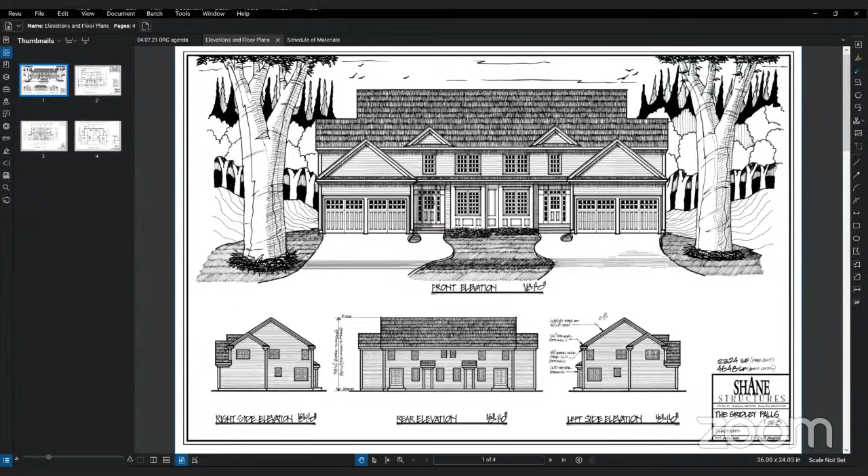Is my screen visible? Yes. Okay, you can see the drawings. Great. Do you also have the site plan, Diana? I can bring it up. Yeah.

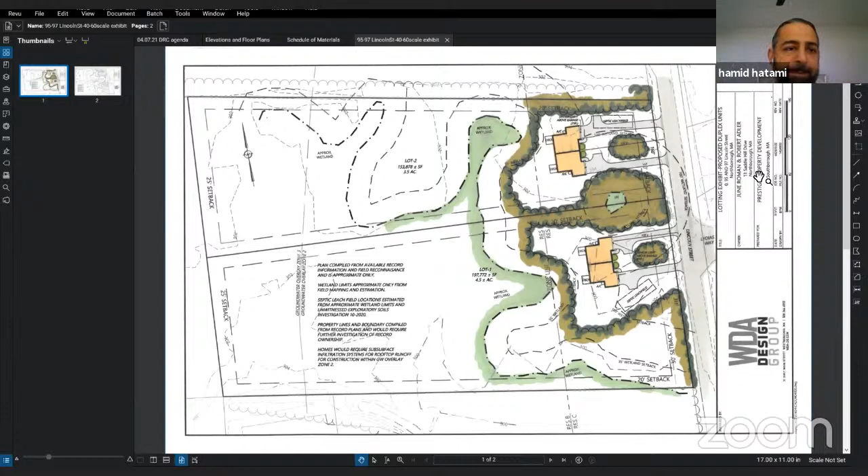So do we have Brian Waterman and Hamid available? Yes, and then there was a phone number in the waiting room that's no longer there, but I don't know if that was part of the applicant's team. Good morning. Good morning. Salam alaikum, Hamid. Alaikum salam. Thank you. So is Brian going to join us? I believe so. Yeah, it says he's connecting now. He may be having some connection issues.

So Hamid, Brian sent us some photographs of the site that showed the standing water in the northwestern corner of the site. Has he discussed this with you, how to mitigate that? Water and stuff, correct. Yes, yes. We'll be taking the appropriate measures for that, correct.

This is Brian Waterman. I'm having computer issues with my audio, so I'm on the phone. Can you hear me? Yes. Okay. Yeah, the photos, if you see the wetland line off to the left, the standing water and ice are in that internal wetland. Yes, inside the wetland there. And they flow to the south and connect with an intermittent stream that goes to a culvert, which discharges under Lincoln Street to the east. So that's where all the standing water is. So we've delineated the wetlands. We finished our survey location of those this week. We're working on finishing topography and property boundary survey.

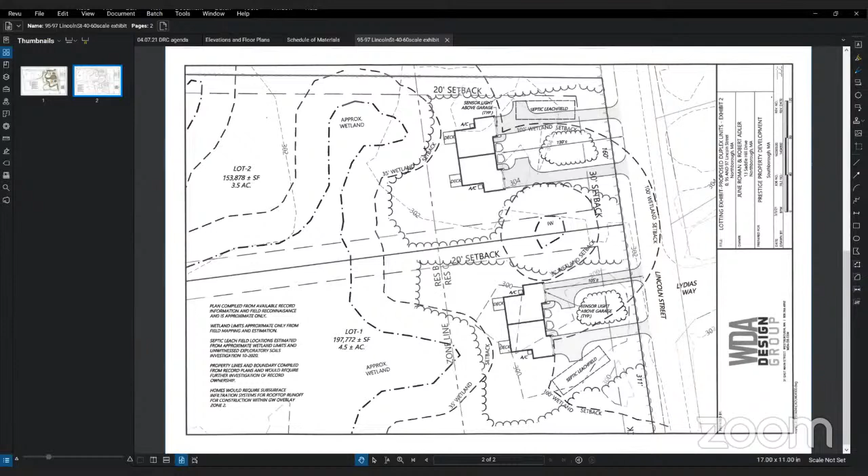Sure, yeah. I mean, this is preliminary stuff without a final design, obviously. So I think it seemed more to figure out what kind of style house would go there, and colors and things like that. But obviously, we need to do more engineering and testing to really nail down a design plan. Okay. Anybody else have any questions? Nope. So now we could go to the building design.

So we received some updated exterior elevations and floor plans and also a materials list. Hamid, did you want to take us through that? Sure. So the last time we presented, the floor plans weren't included. I believe it was David who asked to see them, and it's part of your design review guidelines to have them, so they are included here. They are reflective of what we're going to be building at these properties. I'm not sure if there are any specific questions you have on the layouts or elevations.

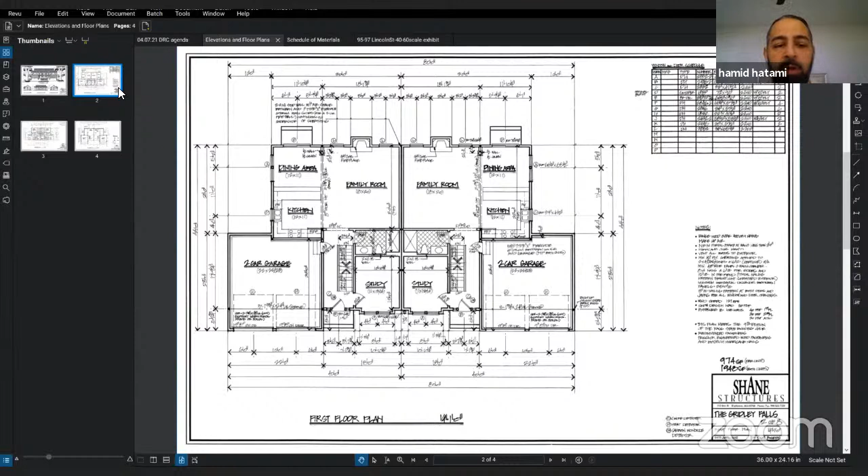I think exterior wise, they're the same, especially the facade. The only thing was on the rear of the house, the site plan was already reflective of where the patio was going to be, but the elevation had the patios on the party wall between the two buildings. They are separate. So the rear elevation hadn't been updated last time, and it is now.

So you showed that one building was going to be gray and the other brown. Do you have any color samples? Yes, so in the schedule of materials I provided links to the websites that have the exact colors and materials. I gave the specific colors, separated by 2 pages, duplex A and duplex B.

If you scroll down, you have to provide your zip code. We all know the zip code. So if you scroll down a little bit, you'll see the khaki brown in the middle, and the pearl gray down to the left. These two.

So is this a smoother textured siding you're proposing? It's HardiePlank, it's got some texture, slight texture. Can you get smooth? To be honest, I'm not sure, I'd have to find out. I think it's both available. Do you want me to look for it on the website? No, that's okay. My preference would be to have smooth, because if this is imitation of a wood product, you'd never have a wood product that would look like this. It would always be pretty smooth unless it was a shake or a shingle.

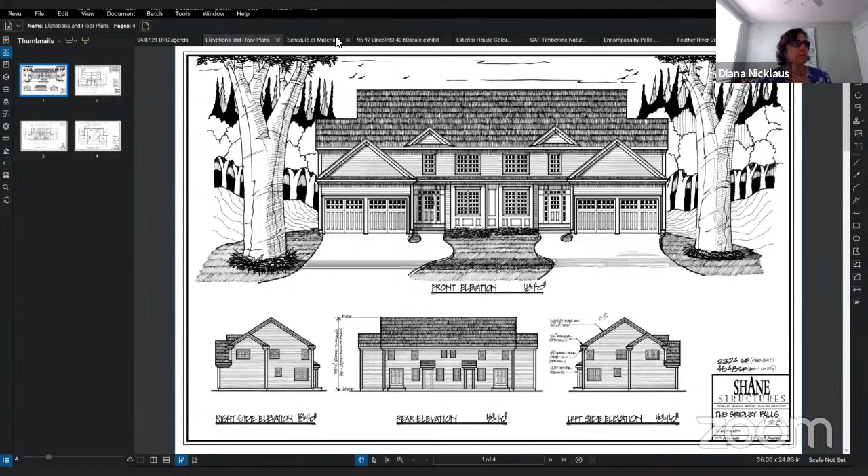And are the garage doors going to be like they're designed here? Are they going to look like that? They're a craftsman style door, so yes, they're going to have the details on the bottom as well as the glass inserts on the top. I use a Haas door.

Oh, that doesn't look like that one. Not like that one. Let me see if I can get it up on my web browser though.

So again, Hamid, if you're mixing colonial architecture with an Art Nouveau front door and craftsman style garage doors, you're getting a stew of styles. So look at your building and try to get the accent pieces to be consistent with the overall architecture.

Okay, I was on the previous Zoom meetings, a couple of them, and another gentleman had the same facade. I figured that this look is the same as theirs, believe it or not. I thought that it was a look the town was more looking for, especially when we started talking about the decorative handles that were on the doors I typically installed, and that wasn't viewed very highly. So I figured this was something you guys wanted to see, but if it's not, I'll gladly change it.

Well, it's not that we're looking for a specific style. We're just looking for the quality of your design work to be internally consistent, and not like a candy store picking one of these and two of those and throwing it together. We want the integrity of your design to work.

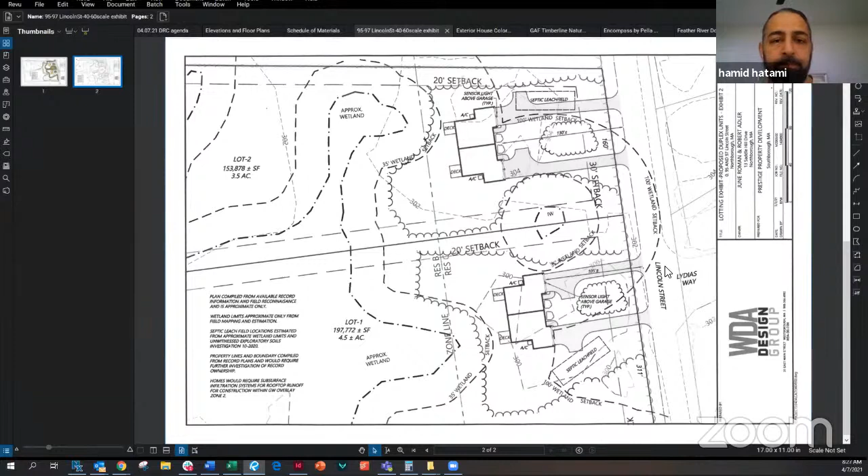I know there's not much on landscape, nor is there really anything for us to go by, but have you thought about doing any beds behind the two decks or on the side of the homes? To be honest, no. I wanted to keep as much yard space available for the homeowners as possible. With the amount of wetlands in the back and the tree cover we're leaving, some units don't have as much backyard space, so they may have to use their side yards more for their kids. These are 4-bedroom units, so I'm expecting families with children, and the more yard space they have, the better, whether they want swing sets, trampolines, or whatever.

I was actually thinking in terms of the HardiePlank going down the side, and a lawnmower or weed whacker damaging the HardiePlank, running a bed of a foot or two, whether it be stone or something along the sides, just as protection of the HardiePlank.

Typically the foundations are about 18 inches off, so a lawnmower wouldn't hit it, but I get the point. I can look into either putting a slight bed of stone or, like you said, just putting mulch beds around. In my typical builds, I don't put mulch beds all around because homeowners don't maintain them and weeds grow out of them. Even with fabric down, they still die off and people throw grass clippings on top. It looks good when you walk out the door, but after that it doesn't really hold up. My experience has been that the upkeep doesn't happen.

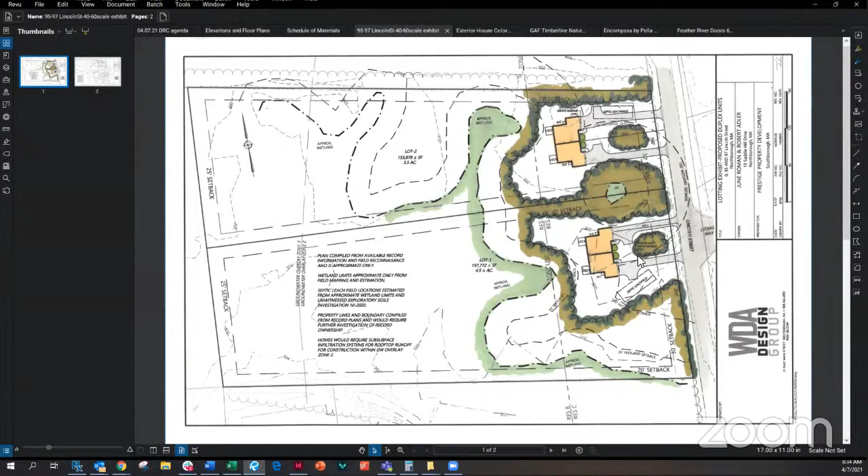Well, you don't have much room on the northerly site in terms of septic location, even though it's enlarged here. Right, yeah, and like I said, that's based off that line. As soon as I can take a look at what our survey crew picked up for the flagging, I'll see if I can apply that to this general layout, and we could take a look at that and see if it moves back 10 feet or moves forward 10 feet, now that we have an actual line located.

Now, that still needs to be approved, as Hamid pointed out. We still have to file that with Conservation Commission to have them approve that boundary, but I'm pretty confident in where it's located.

So I'm in favor of voting on the building and site design at this time. Diana, I would move to approve that contingent on the wetland survey. Yes. Okay. David, I'm in favor. Lisa, it's fine. Okay.

So Brian, Hamid, I think we're good with the design layout. If there's any significant changes to the positioning of the buildings and/or the septic system, we get notified of those changes.

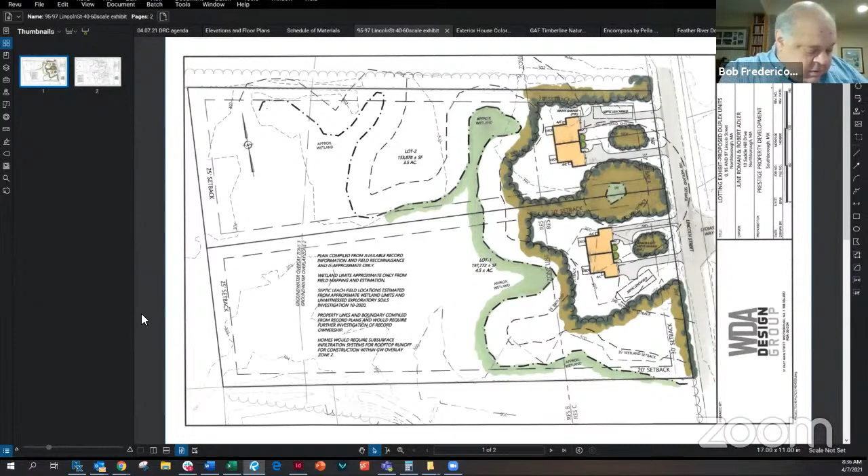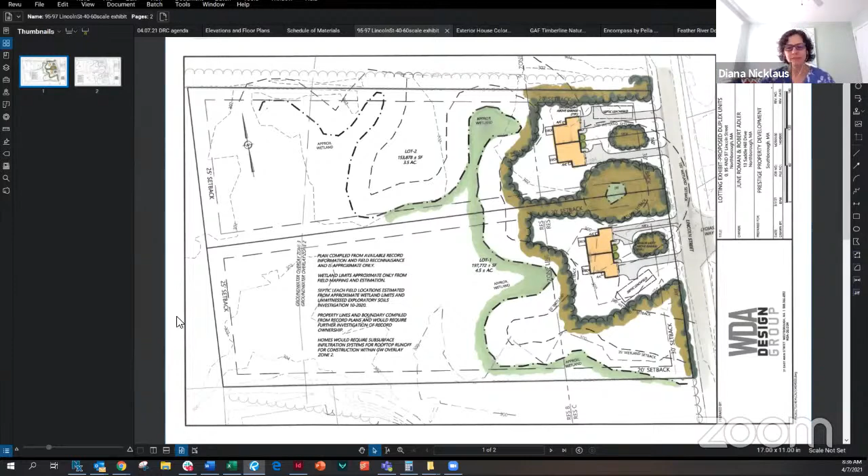So do we need to officially close this discussion? I move that we close this discussion. We have a second here. Everybody in favor? Aye. Okay, well thank you very much. And we'll bring Michelle back in and we'll resume our meetings minutes discussion. Thank you. Bye-bye.

Okay, so the next on the agenda is consideration of minutes. I think I read online that Dave, Tom, and Diana all approved the 316 minutes. Did you guys approve the 330 as well? And then Lisa, did you get the minutes to review and approve them yet? I did, but I don't have anything to do with the one you first talked about because I wasn't at that meeting. Okay, the 316 minutes, you weren't at that meeting. Okay, right. Has everyone received the 330 minutes?

I don't think so. I think so. Yeah, she notes 330 down here, but I'm not quite sure that we've received them. So why don't we just make a motion to approve the 316 minutes, since we all accepted them except for Lisa, who did not attend that meeting. If someone wants to make a motion to approve them and then second it. Motion to approve. I second.